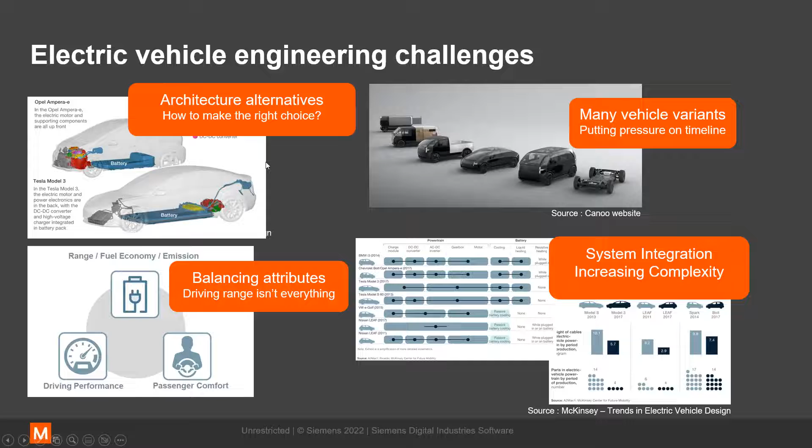So if we go to the next slide, it's a bit of a different aspect of the challenges we see. I'm quoting from a McKinsey report that was looking at the profitability of electric vehicles in the market, and essentially coming to the conclusion that most electric vehicles are not as profitable as they need to be in order to be profitable for the company that brings them onto the market.

There are relatively few electric vehicle car companies that are really making good money. And that's just, I think, a fact of this all being relatively new. You can think of a lot of stuff that could be done in manufacturing, and in product strategy, in order to improve the profitability.

But we're looking at development. And when we look at development, a number of things are highlighted, for example using a native and modular EV platform. Starting not from a combustion engine vehicle and converting that, but starting from scratch. A nice example: if I take a Volkswagen Golf electric and an ID.3, similar size vehicles in my opinion, you look at the price difference - the ID.3 is quite a bit cheaper.

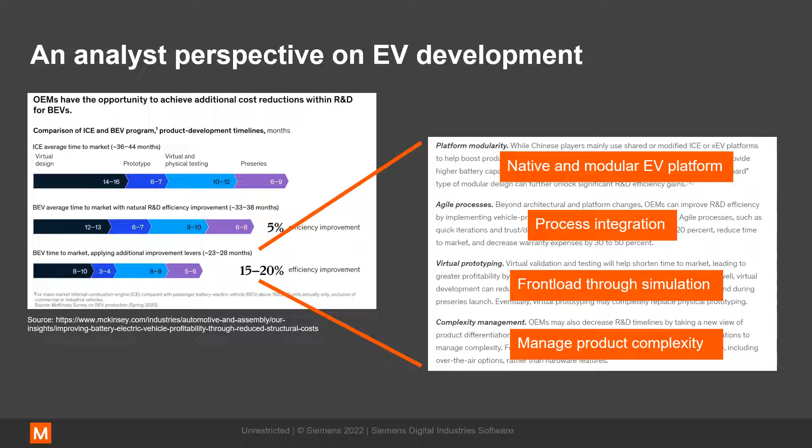So if we go to the next slide, you could say, okay, let's start with what people call digital threads and these elements, essentially integrating the development process.

That's a first instance, starting from your requirements, your product design, all the way to your design for manufacturing and so on. You integrate all that into a system, a PLM system, where people can really work together in an efficient way. That covers, in essence, the overall traditional product development as we see it. So you have very good views on what you're doing at every stage of the moment, and you can share data and so on. That's all fine.

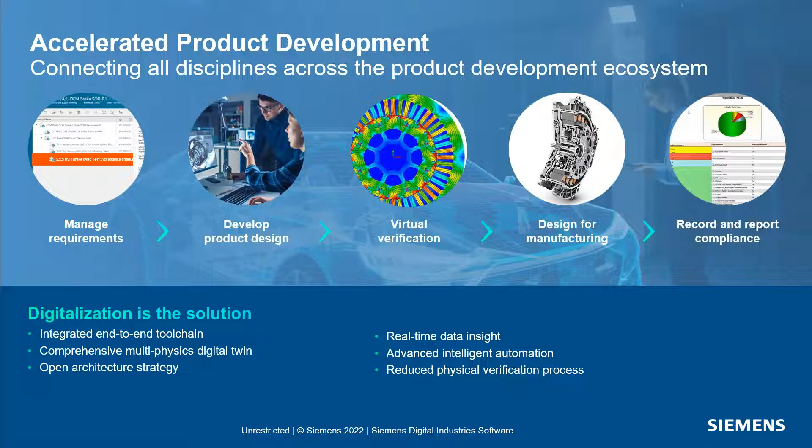But if we then go a little bit deeper and look at an electric drive system by itself, and think about what are the challenges here. We're going to have to develop one box in which we combine an electric motor, a gearbox, and the power electronics. So we're now bringing together multiple disciplines from the design side, but also from the engineering side, because we're looking at mechanical issues, electromagnetic issues, and definitely thermal issues that exist within these different systems.

That's completely different from what we did with combustion engines, where an OEM would have an engine department, they would develop an engine with its control system. That's comparable to the electric motor here. And then they would have a transmission department, or they would go out to a supplier like ZF, Aisin, BorgWarner, and others to buy a transmission, bolt it on there, and done - we have our driveline. Now we really need to collaborate here.

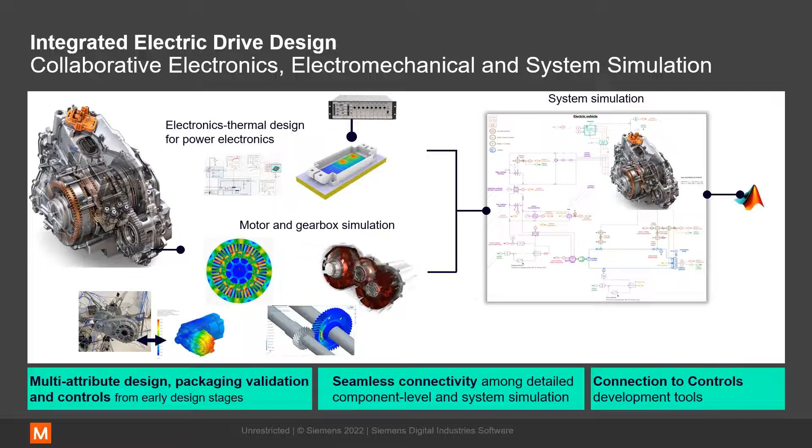And if we think about it, you have different disciplines, and I'm showing here power electronics. We're looking at the electric motor, for which we will dive deeper in the rest of the presentation. You have your gearbox. All these elements need to come together. In our concept, all this collaborative engineering really needs to happen in parallel and collaboratively. So we're looking at this system, different components.

We need to define what is that system, and that system of systems, because the electric drive is part of a complete vehicle, but the electric drive by itself consists of multiple subsystems. So we need to define all those. We need to define the interfaces between them. We need to be able to cross-domain work across these interfaces, which means really a big challenge on how you integrate the program, how you make sure that everything works together at every stage of development.

And we'll be looking at the conceptual stage first for something like an electric motor, how to deal with the sizing. We'll look at the further development of that electric motor, but that happens in parallel also for all these other elements. And again, especially when we look at thermal aspects, for example, we have the power electronics that need cooling. We have an electric motor that needs cooling, or it will actually degrade rather quickly. And we have a gear system that needs cooling. How do we manage that?

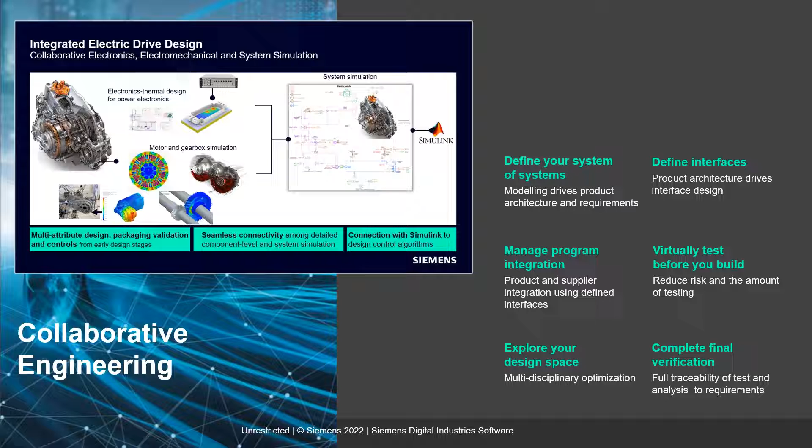That's exactly what we try to achieve with our view on, with our ideas behind the Simcenter portfolio in terms of developing these systems. So if we continue, what are these challenges?

Just very quickly, three big blocks. We want to have an efficient motor, a very efficient motor that is essentially good - essentially we say we want to develop a good motor, highly efficient in a wide range of operating conditions, without any thermal effects, without any issues in terms of noise and vibration, perfectly integrated in the vehicle or integratable in the vehicle. But we want to do that at a reduced cost.

We want to reduce the amount of rare earth materials that we use in there, so the design of the motor is critical here to reduce those elements. At the same time, increasing the power density and minimizing the weight, but again, making sure that we don't get into any thermal issues there. And to accelerate that development, integrating and collaborating amongst the different disciplines - electronics, electrics, thermal, electromagnetics, and so on - is absolutely essential.

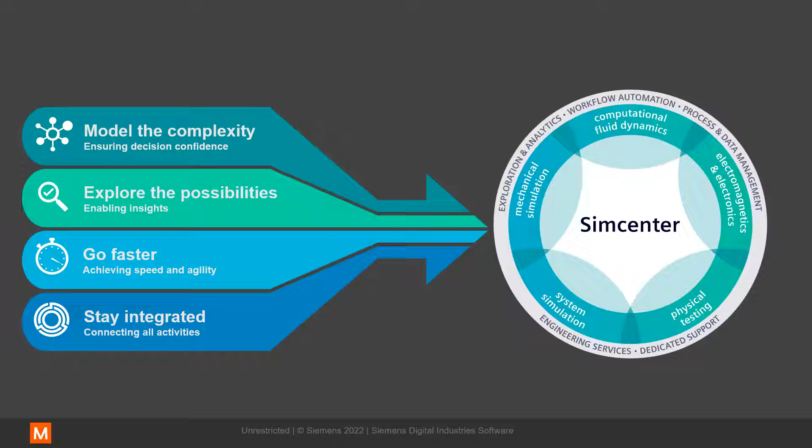And with that, I would like to hand it over to Anthony, who is going to look at electric motor development, going essentially through a number of these elements, these pillars that I just highlighted within the Simcenter portfolio, but then applying it to an electric motor development.

Thanks Stephen, that's a really nice introduction to what I'm going to be doing. So we're going to talk a little bit about the motor design process. I expect most of you are at least familiar with the process of designing electric machines or other mechanical devices. Classically, we'd start by defining some operating requirements, either from data sheets and external sources or by doing internal system simulations and calculations. Using these requirements, we can develop an initial motor design, which will typically be either analytically based - so based on equivalent circuits, or based on existing data and fitting your requirements into that - or on simple analysis systems such as 2D FEA or other simulation techniques.

When we look at the wider perspective, where we want to go deeper into the possibilities and look at all the little variables, we start looking even deeper. We're going to look at advanced modeling, often in 3D, that go beyond the capabilities of our existing simulation tools. We'll even be looking at multiphysics tools, where we can take electromagnetic results and hand them off into CFD and thermal situations, or structural or acoustic simulations, and see how those react.

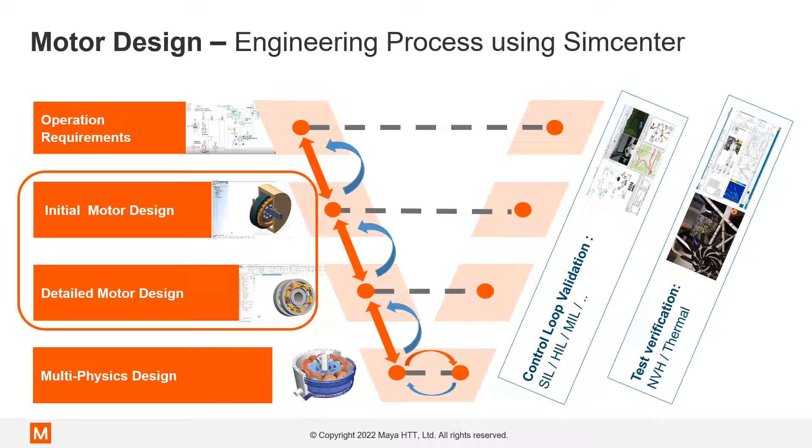For today, we're really going to be looking at the middle stages of the simulation process, how to initially set up a motor design, and how we might explore that into detailed motor design as we move further along. Today's subject really has a lean towards thermals.

In electric motor design, there are a number of reasons why cooling can be a really important factor in your design process. When we run at different operating temperatures, especially high operating temperatures, we can see substantial negative effects to the performance of our machine.

We might have high temperatures that lead to reduced magnet strength, which leads to lower torque and lower power performance. We might see decreased coil conductivity, leading to higher resistivity in the coils, higher losses, and more thermal buildup, creating a feedback loop. In extreme conditions, both hot and cold, depending on your materials, we can see permanent damage.

We can see permanent demagnetization in magnets, reducing the effectiveness of your machine for the rest of its productive lifetime, as well as damage to other materials such as liners and insulations in the coils, or the structural materials around the motor itself. This can be highly detrimental and cause serious problems after devices have already reached market.

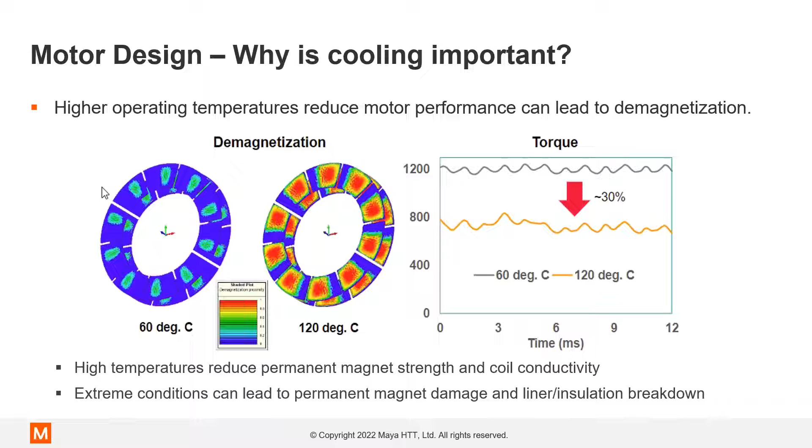So the next things we'll be looking at are quickly how we might use the Siemens Simcenter toolset to set up a basic electric machine model, and how we might use that basic model to start looking at behavior both on the electric and thermal sides.

So we talked about the overall workflow for designing an electric motor earlier in that nice V-shaped slide. But now let's talk about the workflow a little more specifically, how a designer or an engineer might approach it. We have our initial specifications that have come from system simulation or data sheets being provided and requirements being provided by external sources. We can use this information to set our initial definition.

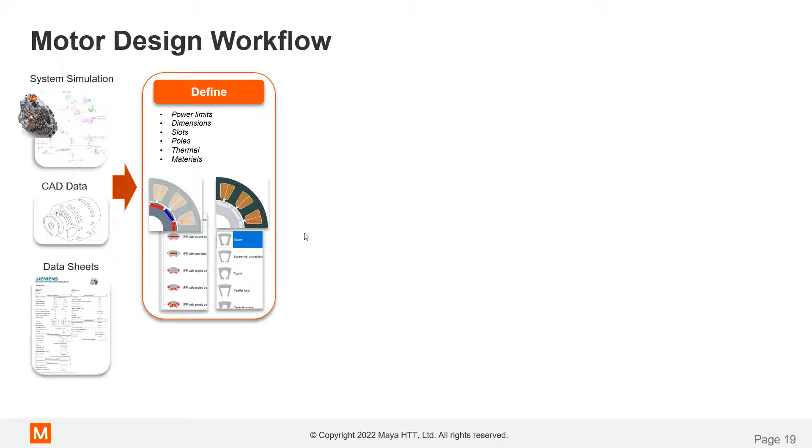We need to know initially things like power limits, limitations on our materials, or thermal considerations, if that's something you want to take into account early. You might have ideas about the number of slots or poles, rough dimensions that you're interested in.

Once we have that rough outline set up, we can start looking at specifics for the design. We can start looking at rotor and stator geometries, winding layouts and drive systems, and how we can size up our wires and specify our machining process to design our pieces.

Once we have a fully designed piece, we can go and analyze it. We can often use 2D analysis for rapid results that are accurate without having to be tweaked with adjustment factors. This can give us basic information that designers might be interested in, things such as torque calculations, efficiency maps, and field saturations. But we can also start to use that information right from the beginning to look at thermal analysis and behaviors on that side of things.

Once we're comfortable with how our machine is performing from an electromagnetic perspective, we can loop that into verification. Does this meet our requirements? Does this do what we expect it to do for our use case? And if not, we can loop back and start looking at it again, making modifications as we go.

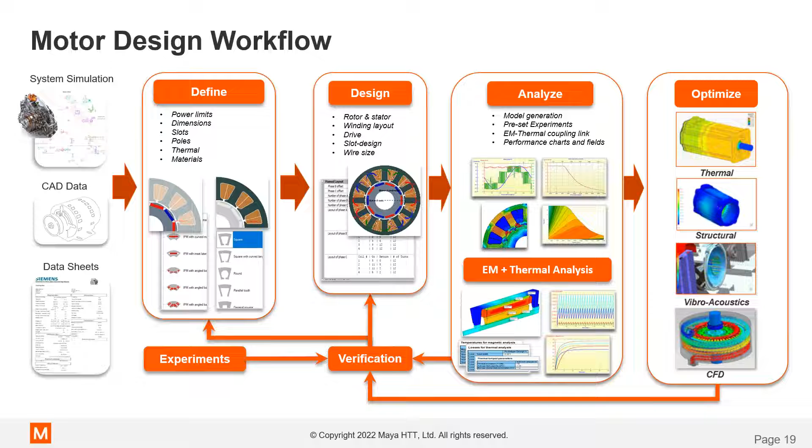We can also take those results and pass them on to other solvers. We might be curious about the acoustics or the thermal and CFD sides of our design and how these tie into other physics. Using these results, again, we can come back, verify that we're meeting the requirements that were set out right at the beginning, and that the system is working as it should as an overall unit, not just the electric machine in isolation.

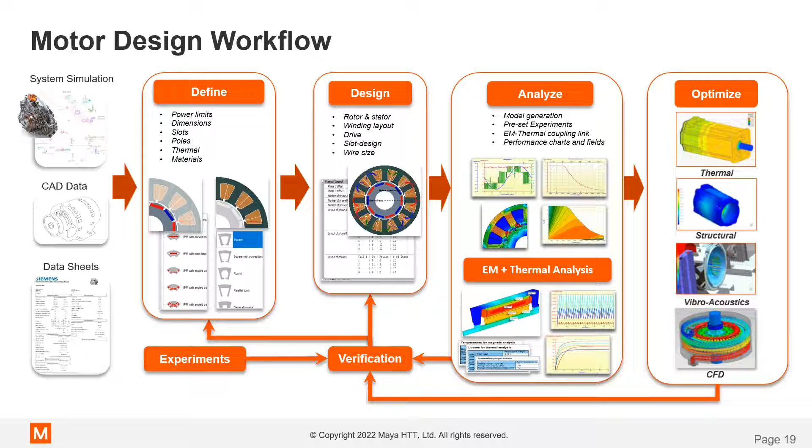We have a quick demo here where we'll show you very briefly the process in just a couple of minutes of a 2D design system from Siemens Simcenter.

So this software is called Simcenter MotorSolve. It's a 2D initial machine design tool. We can see that we have cross-sectional area.

We have on the left-hand side some areas of interest that we can select to view them. And on the right-hand side, we have some general settings available for us to define things like specifications, general dimensions, and importantly, we have templates. This is a template design-based tool, which makes it very easy to set up and adjust your model.

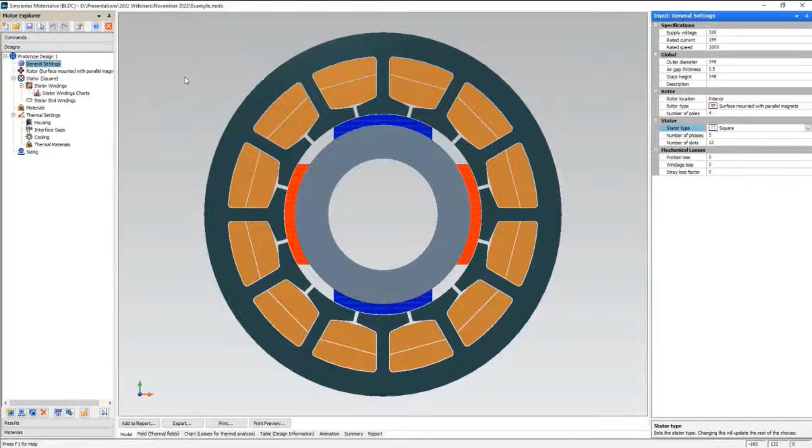We have several templates for rotors and for stators that allow you to choose your geometry. And we have access to import custom geometry using a DXF import functionality. Within these examples, we also can have the templates reversed and have an exterior rotor as opposed to an interior one.

Inside the templates, we have access to all sorts of controls. We have access to settings about how we might skew or adjust overhangs in the rotor, but we also have dimensions that we can adjust, diameters, magnet sizes, and the like.

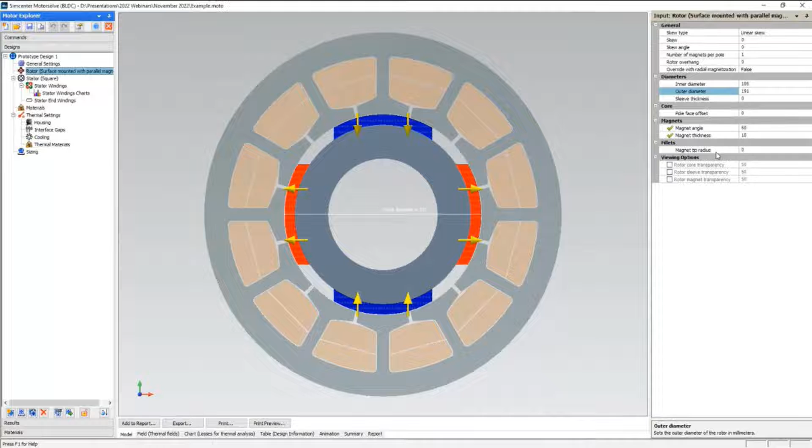Similarly, when we start looking at the stator adjustments, we have very similar controls there to help define the geometry of the stator, the size and shape of the slots and the teeth that we're going to be working with.

In the stator windings, this is where we can set up information such as the control system for it, cross-section information about the slots, wire information, and the winding pattern layout itself. This can be automatically generated using internal algorithms in the tool, or it can be manually input should we want to define our own custom winding specification.

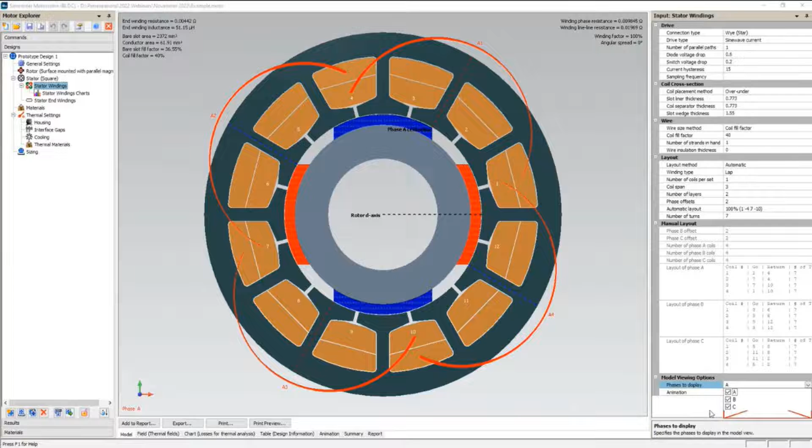In this view, we have lots of controls, including the ability to see multiple phases on multi-phase machines. Many large machines these days run 3-phase, and we have to make sure that the windings are laid out properly in all 3 phases.

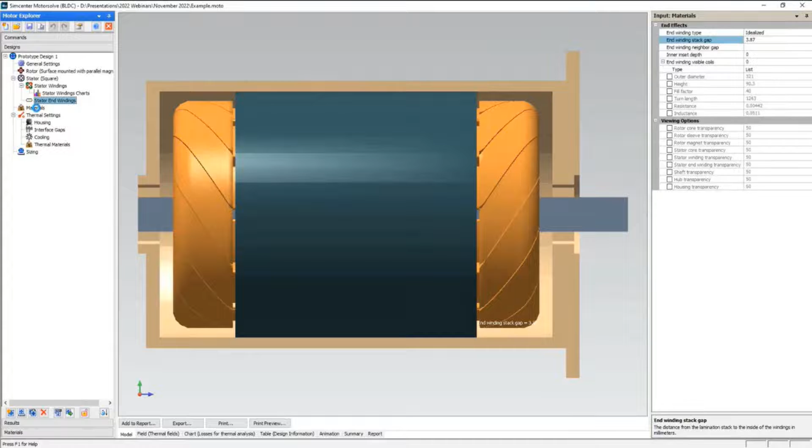From the stator end winding page, we can set some basic information about the end windings. Often, this is just using this extra information to define extra resistance and parameters like that, and is not typically used in the electromagnetic simulations we'll see in a moment.

With our geometry set, we have to define the materials, as they'll have a massive impact on the performance and behavior of our machine. We can choose materials for the rotor and stator, as well as the shaft and hub, to define our electromagnetic system from a large suite of materials that come with this software and are identical across the Simcenter suite.

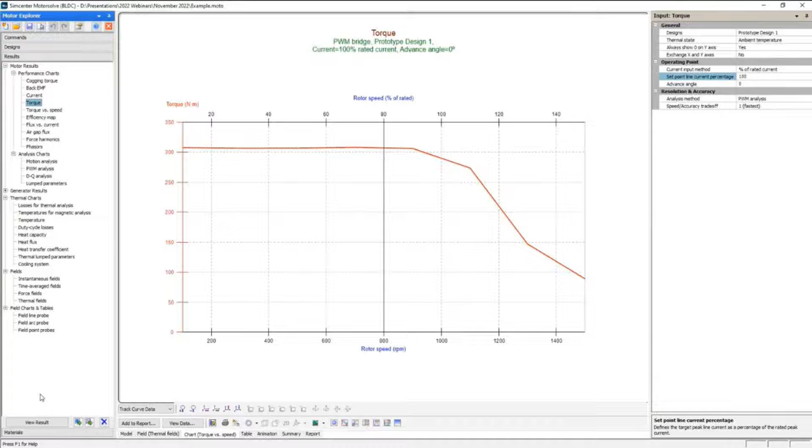Once we're happy with the electromagnetic design, we can start looking at some results from basic simulation. These can take the shape of standard performance metrics, such as torque speed curves, as well as several other metrics—you can see them all listed on the top left. We also have access to results more directly from the FEA analysis that happens, such as what we see here briefly, and we can check fields that resulted from this analysis.

Time average fields might tell us about loss or demagnetization behavior. We might also want to look at the magnetic field at a particular instant in the drive cycle to make sure that materials aren't being saturated and that we aren't overrunning any material limitations that would cause problems and damage.

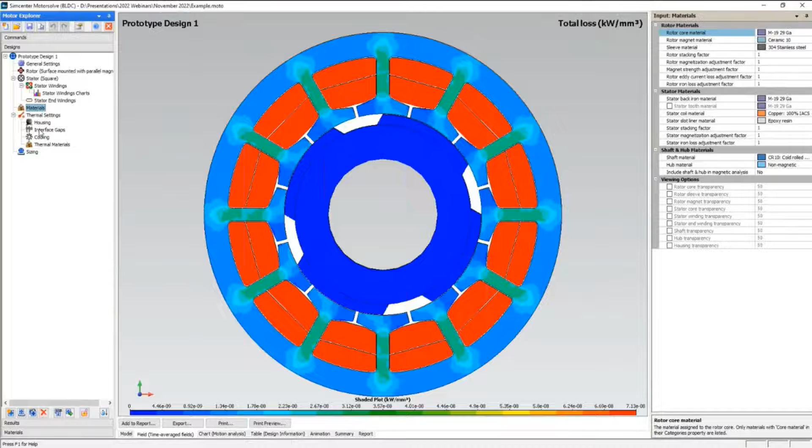With the electromagnetic performance under control, we can start looking at basic thermal settings where these losses are transformed into temperatures. We can define rough geometry for a housing on a very basic scale, assign materials for the housing and other thermal parts of the machine, and then apply some basic cooling parameters.

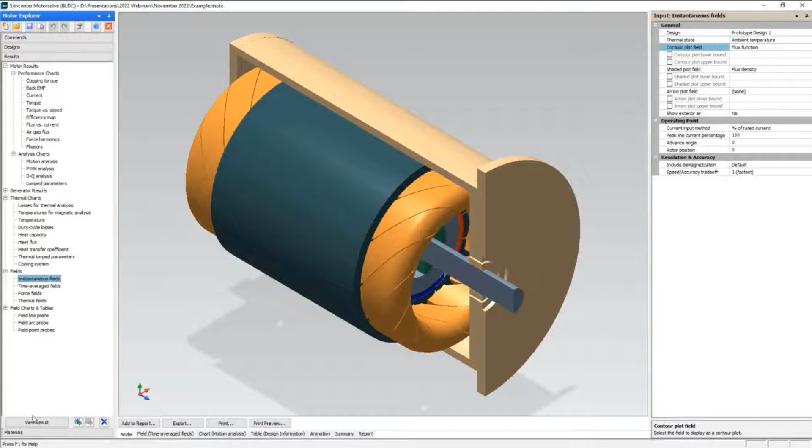Spray cooling, duct cooling, natural ventilation—this is not a CFD simulation. It is a very basic thermal FEA simulation using heat transfer coefficients. It'll give us a good idea of how things perform, but it's not going to be as in-depth or as accurate as doing a full thermal CFD simulation further down the line in multiphysics tools.

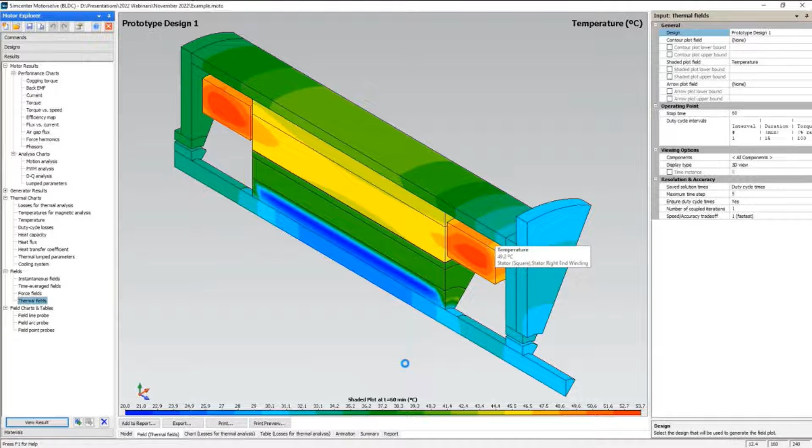With all of these defined, we can look at information such as the losses that might be driving temperature buildup. We can look at temperatures based on a defined duty cycle—if you want to meet a certain standard, especially in electric vehicles, there's typically a duty cycle defined. We can look at a slice of the machine and see how those temperatures are distributed in a 3D slice, to see what is going to be a concern even with this basic cooling. Where are we getting heat buildup? Maybe where do we need to address it when we get to further studies?

Now, when we're talking about 2D motor design, there's a number of benefits to using this as the first stage design. As mentioned, template-based means it can be very quick to automate the process. Somebody has already gone and done the work of parameterizing all these templates, and it's very easy to set up different templates, different shapes, different sizes, just from the control panel without having to manually adjust CAD models.

Same goes for the winding design and the drive system. All of this has been pre-parameterized, and it's quick and easy to change if you want to test different variations. We have some preset experiments we talked about, like the torque speed curve or the torque waveform we saw earlier, as well as being able to see the 2D FEA solutions.

As mentioned, this is a very early design tool, but we can still couple it to basic thermal analysis and give ourselves a first glimpse into how the machine will behave when we start to load it and heat it up. We can use this information to take into account how the material properties might change and how the machine behavior might change through the temperature ranges.

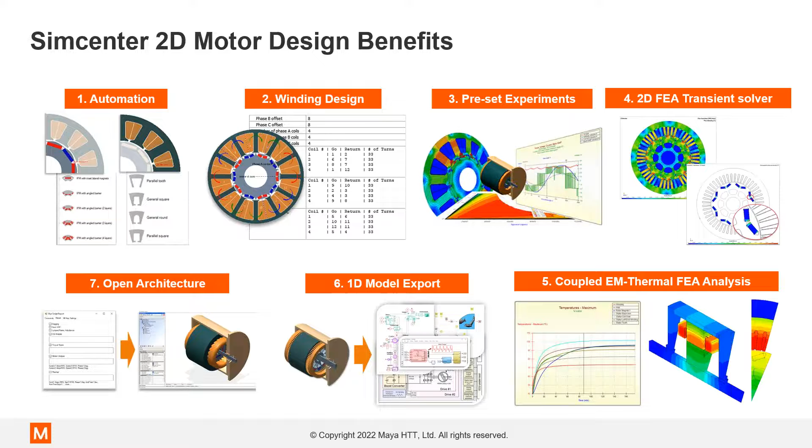One of the fun features of having such an open system and the many tools available to us through Simcenter is that we can link them all together without even noticing the connections. We can use our machine design to link back into our system simulation to see how the overall vehicle might perform with this machine design. We can hook up to a system optimization tool where it's taking parameters, optimizing based on system results, but it's modifying the machine, so we're doing optimization on the machine design to optimize the performance of the entire vehicle.

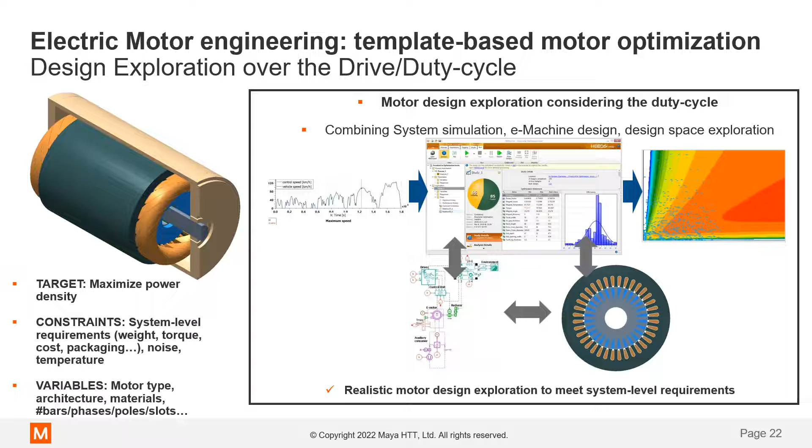Using this, we make sure we're finding a machine that doesn't just meet the paper specifications, but is actually meeting the entire requirements of our system as a whole without choosing anything in isolation. We can adjust all sorts of parameters, and with the open connections, we can optimize based on any other physics we're interested in as well.

Often we get asked about how we validated our machine design tools. This is just one example where a customer of ours wanted to validate the machines and went to test it against the BMW i3 machine. There's a fairly well-documented motor that's been tested in independent labs, and a lot of that data is available to the public. Our customer built an identical model to the BMW i3 traction motor in the MotorSolve tool we were just looking at.

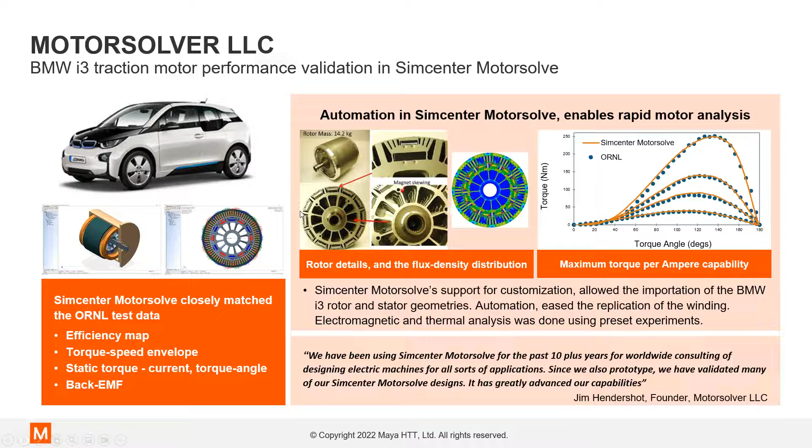When they compared the results coming out of the 2D finite element analysis to the results tested on a bench in independent laboratories, we found a very, very high correlation between the simulated results and the physical world results. This gives us huge confidence in being able to push this initial design system as a confident way of starting your design process.

Now, we mentioned 3D design earlier, and it's an important part of the simulation tool, especially as we drive into higher performance and higher performance density machines, where every little bit of performance counts. 3D effects that we might not see in 2D simulations include end effects, fringing and leakage, for example, where you might have effects causing heat buildup, field leakage, or other performance degradation because of the edges of the model. We can also start to look at how we might address cooling in a 3D manner on our machine.

We can change the templated designs to have impossible geometries that weren't possible in the template, and we can create non-symmetric cooling solutions that might be more efficient for our use case, which we couldn't have modeled in two dimensions.

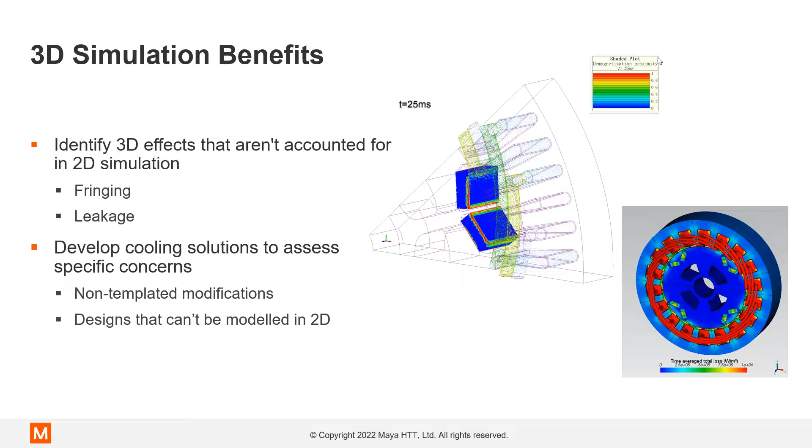One case where 3D modeling is exceptionally important is when we're looking at axial flux machines, and these are becoming more and more popular in a lot of use cases. Axial flux machines, by their nature, cannot be modeled in a 2D simplified way, so we need to start with a 3D model.

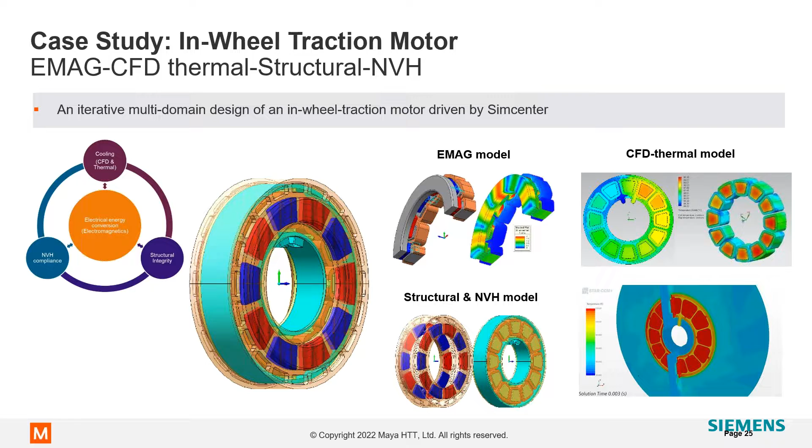Through Simcenter, we have the ability to model this entire 3D geometry, and within a single environment, we can explore the electromagnetics behavior, but we can also take that model and those results and pass them into a structural solver or into a thermal and CFD solver to see how this machine will operate across a variety of different domains without having to leave a single software environment. This massively speeds up the development process and makes it a lot easier for communication between different teams and different parts of the development process.

So as I said, we can have one single environment. Simcenter 3D is this environment from Siemens in the Simcenter ecosystem where we can build our design and initially look at the electromagnetics, but we can then take those electromagnetic results and look at the structural behavior and the acoustics that result from that. We might also look at the thermal behavior and the CFD analysis that'll help us manage that a little bit better.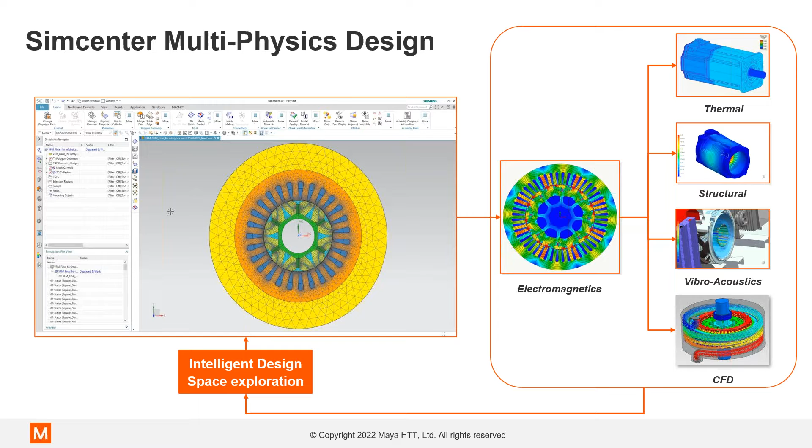All of these can be tied together using design optimization tools, where we can take the results from one simulation to modify the behavior in another physics domain, allowing us to make sure that we have the absolute best machine for our use case.